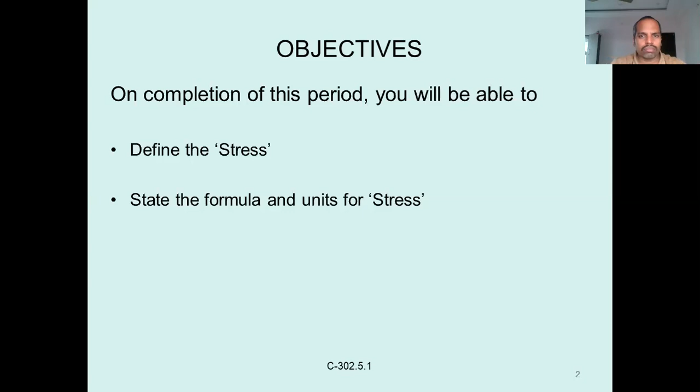When an engineer designs a structure, it is essential to have a concept of the various forces acting on the structure. If you are designing a structure, you should know what different types of forces are acting. Let us say, for example, you are constructing a building.

Okay, residential building, let us say in somewhere, depends on location. Let us say in Hyderabad, you want to construct a building. So if you are constructing a residential building in Hyderabad, a multi-story building, or a one or two story simple building.

So in that, what are the different types of loads? If we construct a multi-story building, we may need to consider heavier loading. If you are constructing just a ground floor building, the loads may be lesser. Not only quantity, but the types of loads acting may or may not need to be considered. Suppose you are constructing a multi-story building, let us say a 10-story building or 15 or 20-story.

Nowadays it is very common practice to go more than 10 or 15 or 20 or 30 floor buildings. So in those cases you have to consider different varieties of loads, as specified by our Indian standard code.

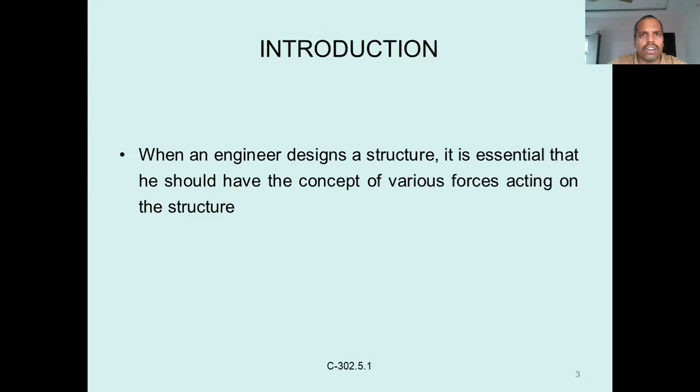The main objective of a civil engineer is to design a safe and economical structure. So if you are designing a structure, there should be two main criteria. One is it should be safe - it should be able to resist the loads that come on the structure, it should be able to bear that load. The second is it should also be economical. So without losing economy, not at the cost of economy, the design should be safe and also economical. There shall be an optimum consideration, so that it is safe, as well as economical to the maximum possible extent.

So what does safe and economical design mean? If you are designing a beam or a slab, from the design point of view, it may only be required to have 150 mm thickness. If you provide 200 mm thickness instead, meaning you are going with a higher factor of safety, providing 200 mm instead of 150 mm, that increases the cost a lot. That is where the civil engineer's role becomes crucial. If you provide 200 mm instead of 150 mm, it will be safer, no problem, but it becomes uneconomical. So you need to consider that - at minimum cost, at optimum cost, it shall be safe. Safety and economy both have to be considered at the same time. The designer has to take care of all these things.

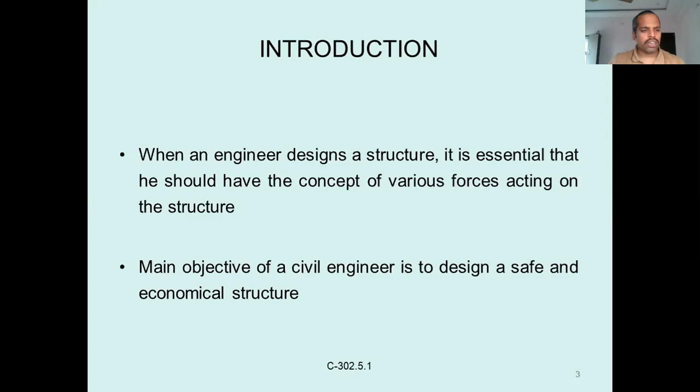You should have adequate knowledge of the properties of materials and their behavior under various external loads. Properties of materials are of course very important - the designer should have sufficient knowledge of the materials being used, and their properties like strength. It may be compressive strength, tensile strength, or shear strength - how it behaves under different loads. There are so many properties, like creep or shrinkage values, and you should know all of them. You should also have sufficient knowledge of their behavior - how a particular member behaves under external load, under tensile load, how a beam behaves, how a material behaves, and which material is suitable for which type of loading.

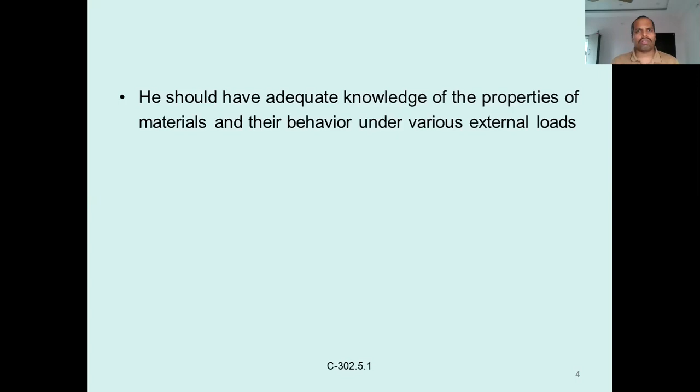If you take concrete, for example, it is a brittle material. Under tension load or bending load, simple cement concrete alone may not be able to take that load - it may fail abruptly, suddenly. So it is not suitable for that type of load. Whereas if you take steel, it can take compression, tension, or bending - it is almost equally strong in all types of loading. So appropriate material selection is also very important for different types of loading.

When an external force acts on a body, the body tends to undergo some deformation. That means when a member is subjected to any load, the first thing that happens is deformation. If you apply a load, the body tries to change its shape, size, or length. That change in dimensions is nothing but deformation.

This deformation starts in a body, whatever type of body it is. Even rigid bodies undergo some deformation. Generally we are using elastic bodies - all are elastic bodies, there is no perfect rigid body. That's why every body undergoes some deformation under the action of external loads.

Because of this deformation, different types of forces set up in the member - stresses. These are the different types of stresses that get set up on the body. Up to a certain extent, if you apply a load, the member can offer some resistance, meaning stresses develop and it can bear that load up to a certain extent. If you keep increasing the load, the deformation keeps increasing, and at some point it fails.

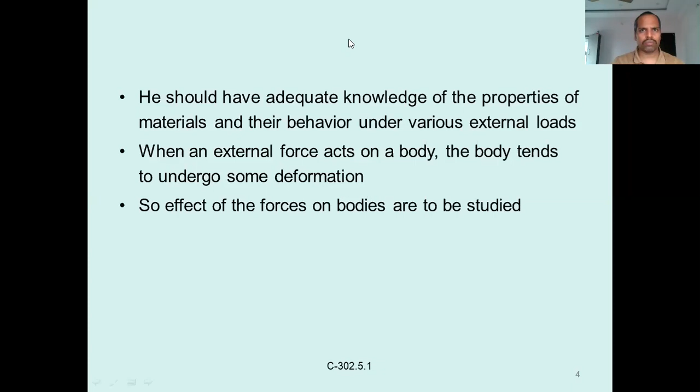Now let us come to the actual definition. What is stress? How do we define stress?

When a body is subjected to an external load - some load is acting on the body, leaving aside what type of load it is - the first thing that happens to that body is that it tends to get deformed. Tends to get deformed means tends to change; there may be change in dimensions, size, length, or area - some deformation. It may get deformed, it tends to deform.

Initially at some load it may not be able to deform, but if you keep increasing the load, at a certain point that deformation starts. So like if you take steel and apply a load of 10 newtons at one point, there may not be any deformation. If you apply 20, 30, 40, 50, 60, 100, 200, 300, 1000, or 2000 newtons, at a certain point the body starts deforming - any member starts to deform, likely changing its shape. Due to this deformation there may be change in shape or change in length - that is nothing but deformation.

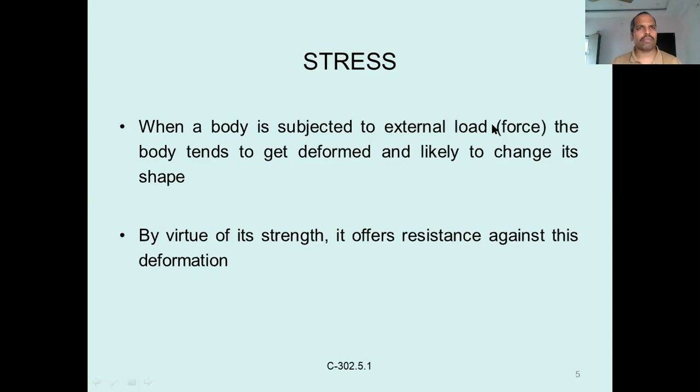Initially if you apply a load to any member, it may not show any effect because the load may be very small. For example, if a member fails at 100 kilonewtons and you apply 1 newton, there may not be any failure or deformation at all. If you increase the load from 1 newton to 1 kilonewton, there may be very slight or negligible deformation. But if you increase it from 10 kilonewtons to 20, 30, 50, 60 kilonewtons and keep increasing, there will be increasing deformation. So initially, at a small load like 1 kilonewton, there may not be any deformation.

What happened? Where is that load going? If you are applying a load on a body, for example, 1 kilonewton applied on the body, what is the deformation in the body?

Let us say there is no deformation observed in the body. But where is that load gone? We are applying the load, but where has it gone?

It may not be able to deform the body because the load may be very less. Why is a lesser load not deforming it? Because there is some resistance in the body. That body will offer some resistance against the deformation. That's why you cannot see any deformation at all.

For example, suppose you take a rubber band. If you stretch it initially up to a certain extent, there will not be any elongation. Once you continuously try to apply the force, trying to pull the rubber band, what happens? It elongates up to a certain extent.

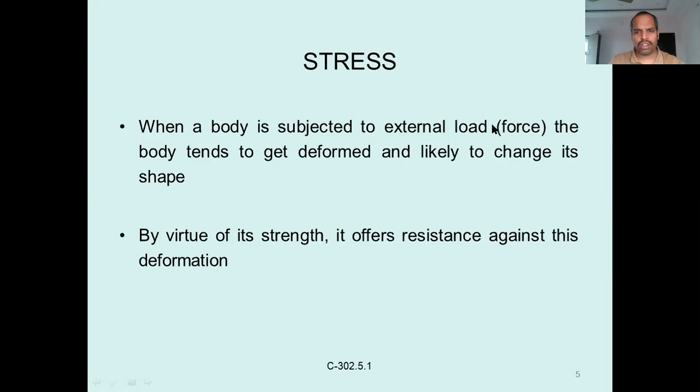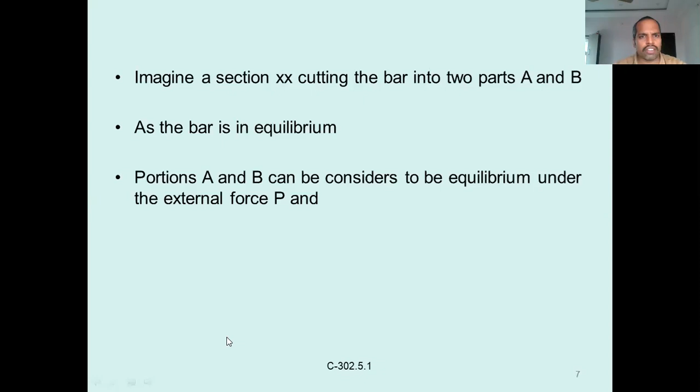Imagine a section XX cutting the body into two parts, A and B. As the body is in equilibrium, parts A and B can be considered to be in equilibrium under the external loads P. The internal resistance offered by the bar should be equal and opposite to P, that is P dash.

So this body, if it is in equilibrium condition, then P shall be equal to P dash. What is P dash here? P dash has not come from anywhere, it is not an applied force.

Only P is applied force. P is applied at both ends of this member AB, and only at the end. But we cut a section at XX away from points A and B, between A and B.

If you cut this up and look at the cut portion, a force P is acting towards the left. This is the external force. For equilibrium point of view, we have to consider either the left or right portion. If you consider the left portion, one force is acting, that is the external force P. For equilibrium condition, what should it be?

For equilibrium condition, we have discussed equilibrium of forces and moments in the first unit. So an equal force shall be developed at section XX so that the body will be in equilibrium condition. Where does that force come from? It comes from its internal resistance.

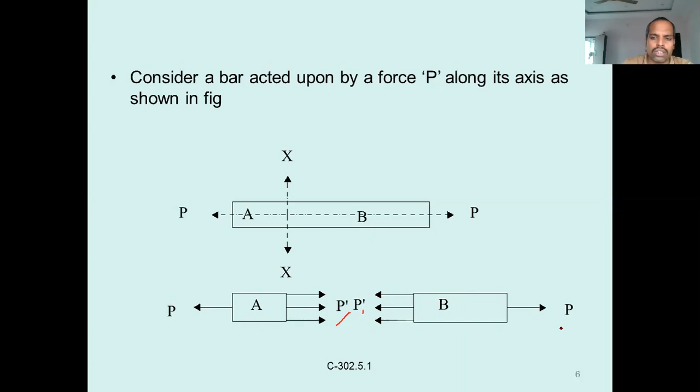So that's what we have discussed here. Now let us go to the actual definition of stress. What is stress? It is nothing but an internal resistance offered by the body to resist the applied load or force. We have seen this internal resistance.

A force is applied on a body, and the body will be in equilibrium condition. If we cut it into two portions, it is applying some resistance. Internal resistance is developed by that body, that is nothing but P dash, which is force, and is the internal resistance offered by the body to resist the applied load or force.

But in this case, we are discussing stress, which is per unit area. It is force acting on unit cross-sectional area. So actually, one definition shall be that it is the internal resistance offered by the body to resist the applied force per unit area.

That is nothing but the definition of stress. It is per unit area, it has to be per unit area. Internal resistance offered by the body to resist the applied load or force per unit area is nothing but stress. Don't forget to write per unit area. It wasn't written here, so I will make a correction.

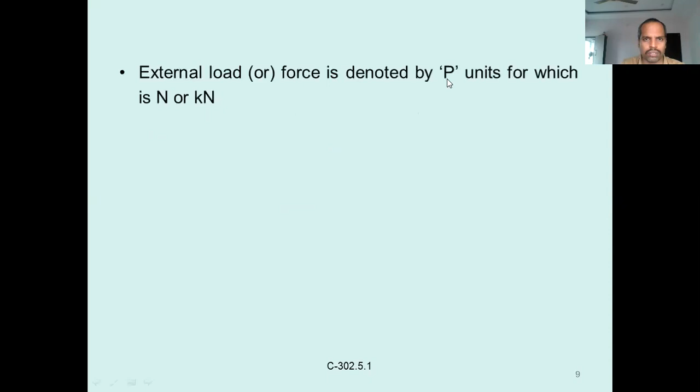So it is nothing but this, you can see here, the force acting on unit cross-sectional area, or force per unit area. We can define it in a way that it is the internal resistance offered by the material against the deformation.

Again, one more thing is missed, not covered here. So think of it as the internal resistance offered by the body against the deformations due to applied loads or applied forces, per unit area, is nothing but stress. Because the first criteria that happens is nothing but deformation.

So against the deformation, the body doesn't want to deform. It offers some resistance. If it completely continuously deforms, it means it is not having any resistance. If you apply load and it simply keeps deforming, it means it's not offering any resistance.

Deforming means it is not offering any resistance. But if you apply a load and your body is not deforming, then that is nothing but it offering some resistance.

Due to that applied load, the applied load per unit area is nothing but the stress. It is the force acting on unit cross section area. Generally stress is denoted with the letter sigma or f.

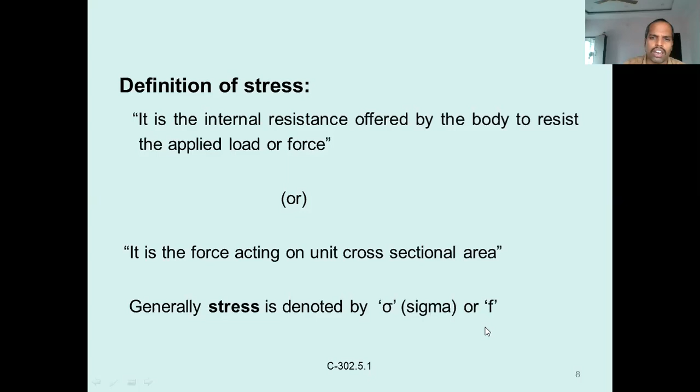Bending stress will be denoted with sigma or f, whereas shear stresses will be denoted with the letter tau. But in general terms, stress is denoted with the letter sigma or f.

External force is denoted by P, with units Newton or kilonewton. Force units are already known: newtons or kilonewtons. Cross section units are millimeter square or meter square. So stress is equal to, in simple terms, force per unit area.

But when somebody asks you to define stress, don't say force per unit area. That is not mathematically expressing the definition of stress.

Stress cannot be directly calculated or estimated, so we have to use some formula, some mathematical equation to compute or calculate the stress.

That mathematical expression is nothing but force per unit area. That is only a mathematical expression, not the definition.

That is not the definition. Stress is equal to force by unit area is not a definition. It's only a mathematical expression to calculate or estimate the stress, because stress cannot be directly estimated.

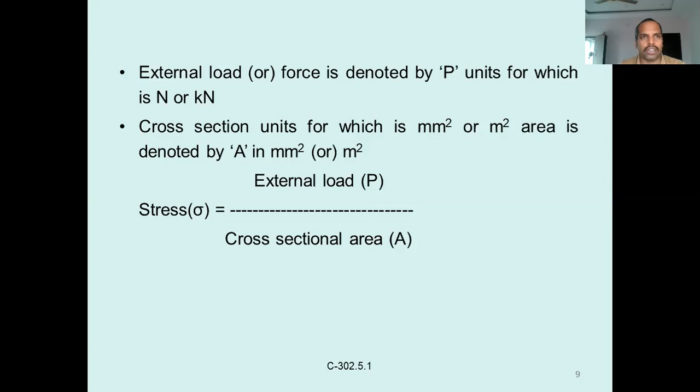If you apply a load on any member, directly we cannot say how much stress or how much resistance it is offering. Directly we cannot say, we cannot see it, we cannot measure it either. Direct measurement is not possible.

We can only estimate it in an indirect way, by knowing how much load we are applying and on what area we are applying it.

Knowing the force and area of cross section, we can find out the stress. That is only for estimation purposes. We use the formula stress equals force per unit area, not as the definition.

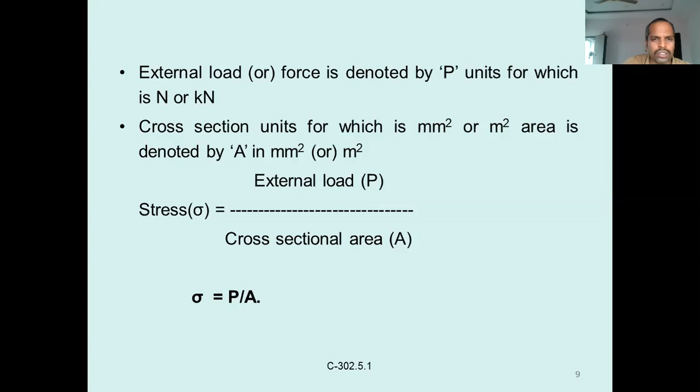So sigma is equal to P by A. The units of stress come from P by A. P is the load, with units newtons or kilonewtons. Area units are meter square or millimeter square or centimeter square. So the general SI unit of stress is Pascal.

Pa is nothing but Pascal, either one Pascal or megapascal. MPa is megapascal. kN is kilonewton per meter square, and megapascal likewise.

Mega means 10 to the power 6. Kilo means 10 to the power 3. Mega means 10 to the power 6. Giga means 10 to the power 9. Tera means 10 to the power 12. These are the general ways of expressing different loads at higher values.

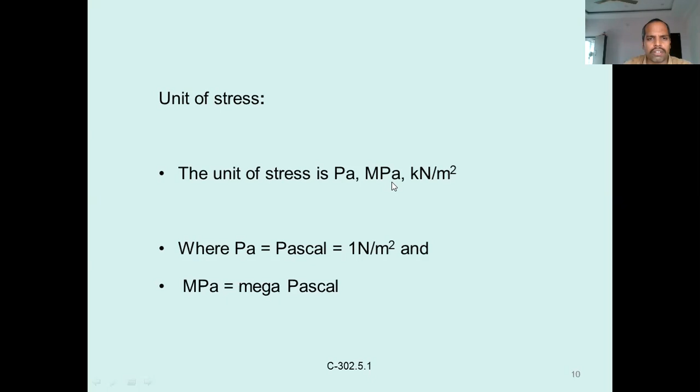Generally, how much is 1 Pascal? 1 Pascal is equal to 1 Newton per meter square. So 1 megapascal, where mega means 10 to the power 6, is what we need to calculate.

The relation between Pascal and megapascal: if we calculate, 1 megapascal is equal to 1 Newton per millimeter square.

How do we get it? It's easy. 1 megapascal is mega, which is 10 to the power 6, so it is 10 to the power 6 Pascal. 1 megapascal is 10 to the power 6 Pascal.

And Pascal means Newton per meter square. Simply, if you keep Newton as it is, and convert meter square into millimeter square, then 1 meter is equal to how many millimeters?

1 meter is equal to 1000 millimeters, and 1000 means 10 to the power of 3. So 10 to the power of 3 whole square in the denominator means 10 to the power of 6. So 10 to the power of 6, numerator 10 to the power of 6, both get cancelled and remaining is nothing but 1 Newton per millimeter square. That's how we generally convert megapascal into 1 Newton per mm square.

Similarly, we use kilopascal, gigapascal like this. Kilo means 10 to the power of 3, giga means 10 to the power of 9, mega means 10 to the power of 6. These are general terms, generally used in the denominator. Pascal is what we use most frequently, these units of Pascal and megapascal.

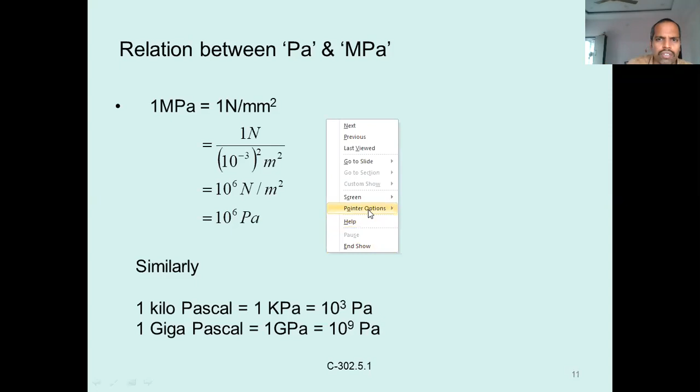Okay, coming to the derivation. I will write here how to convert. So here it is, the conversion is not shown here. So only 1 megapascal here it is shown as 1, 10 to the power of 6 Pascal.

Now let us see how to convert this. So what is this? How to convert this one? So, 1 megapascal is equal to 10 to the power of 6, as we already know. I will write here only so that we can save time. So it is 10 to the power of 6 Newtons.

Pascal means Newton per meter square. Newton per meter square. Sorry, this meter square, assume it, we cannot able to write it properly. So it is 10 to the power of 6 Newton per meter square.

If you want to convert Newtons, you keep it as it is. What is the conversion we need? From megapascal to Newton per millimeter square, we need the conversion. So for that, 10 to the power of 6, you keep it like that only.

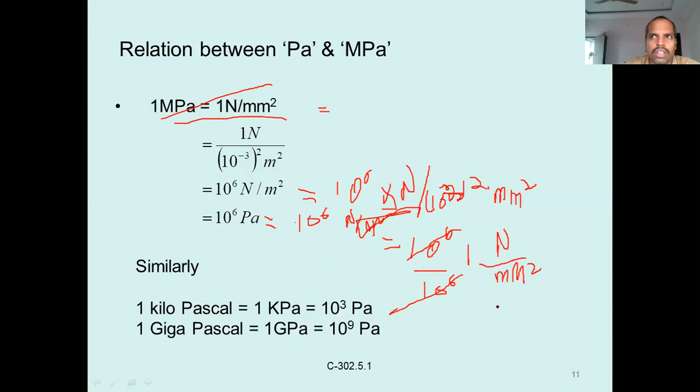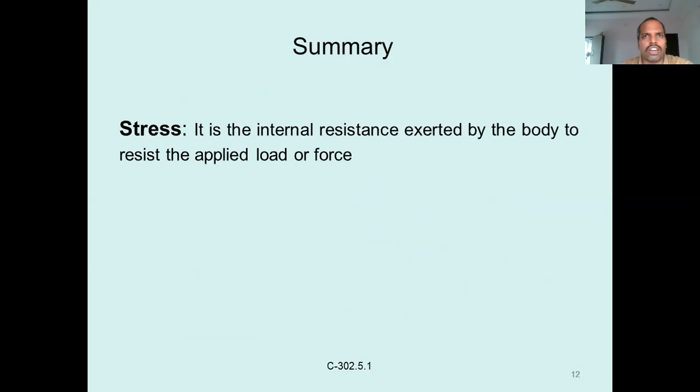Now let us summarize what we have discussed so far. In this one, mainly we have discussed about stress. So what is stress? Stress is nothing but an internal resistance exerted by the body to resist the applied force or applied load per unit area. We are calling stress the internal resistance set up, exerted, or developed in the body against the deformation due to applied loads, per unit area.

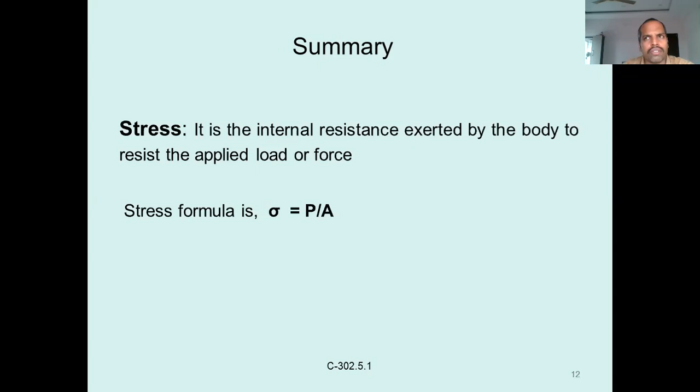So what is the formula? The mathematical expression is sigma is equal to P by A. But when you are asked what stress means, especially in interview questions, don't say that stress is load by area directly. That is only an estimation. How to estimate stress is using this mathematical expression, that is equivalent. Using this expression we can only calculate how much stress will be developed in the member. That is P by A, a mathematical expression, but that is not actually the definition.

So what are the units of stress? Units of stress are Newton per meter square, Newton per millimeter square, kilonewton per meter square, or pascals. You can use any term. Load by area can be Newton per centimeter square, pounds per centimeter square, in FPS or other unit systems. There can be different ways, but generally we express it in Newton per meter square, Newton per millimeter square, or kilonewton per meter square, like this we generally use.

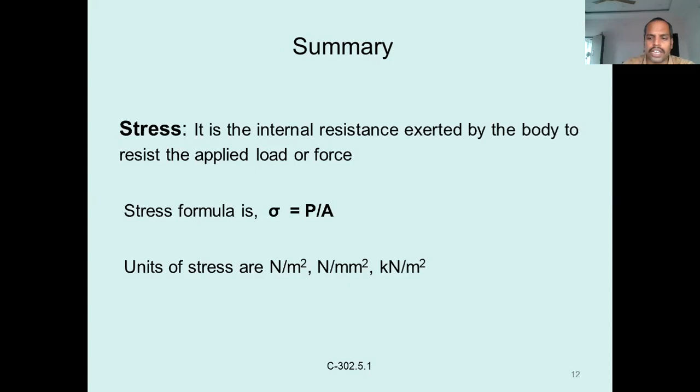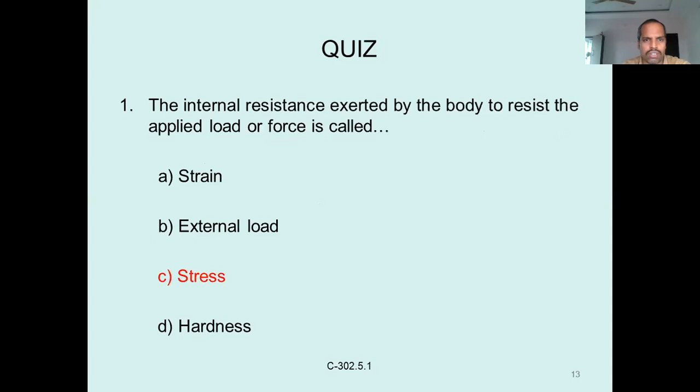So, what is the internal resistance exerted by the body to resist the applied force called - strain, external load, stress, or hardness? The answer is stress. This is the definition of stress. Stress is denoted with what letter? Sigma or F, we use either one.

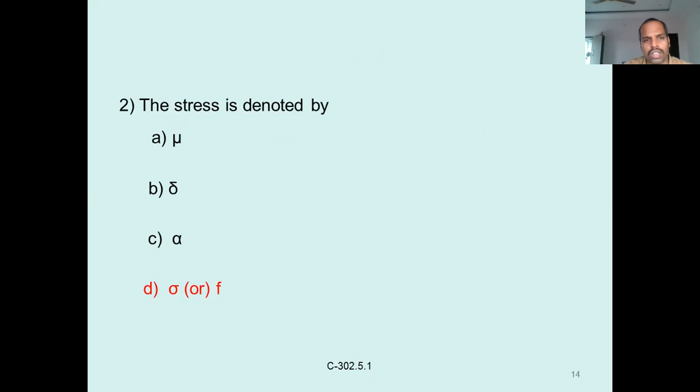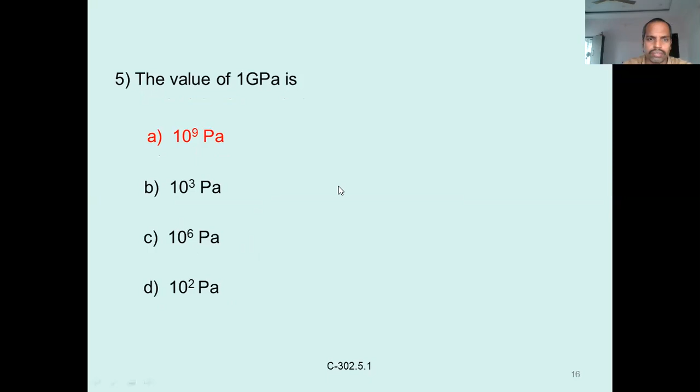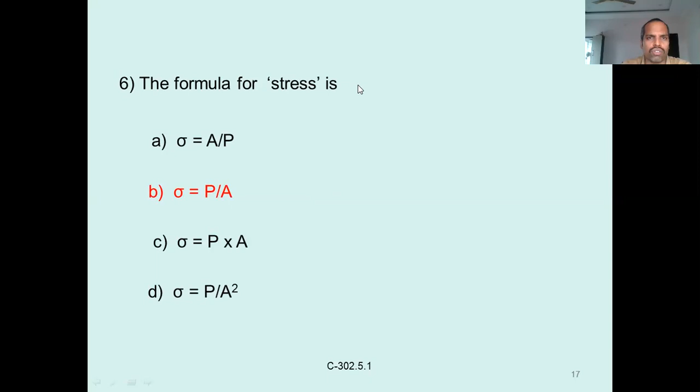The formula for stress is - A by P, P by A, P into A, or P by A square? What is the formula? The mathematical equation to calculate stress is P by A. Stress is equal to load by area. P is a general term - of course when defining or answering a question, you should say P is the load and A is the cross-sectional area. Very specific, but in general, P refers to load and A refers to area. So the definition of stress is generally this. Let us stop here.